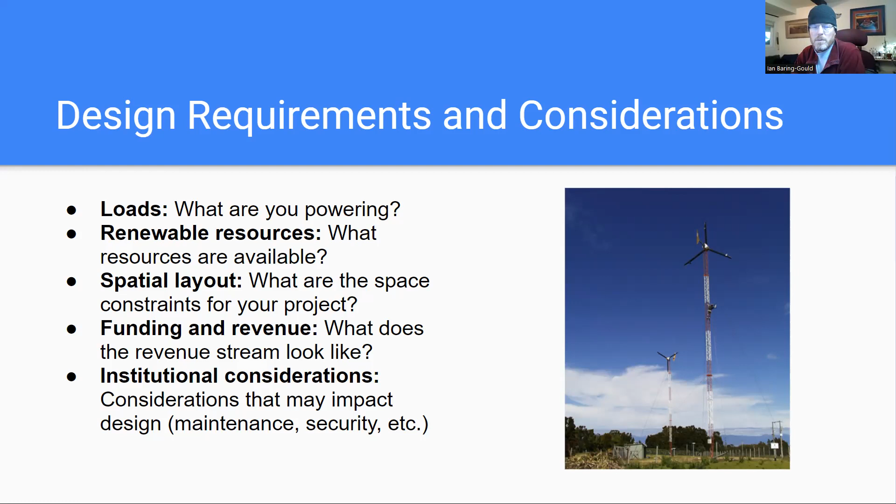So let's go to the next slide, and I'll walk through each one of these at a pretty high level. So looking at the loads, the energy that you're going to use, but building this over the variations that you're going to get from a daily, weekly or seasonal perspective, because all of those will have impacts on your design. A kiosk, as an example, is pretty good for solar, because if it's being used in the middle of the day, you have sun then, but in the middle of the night people are not going to be using it. If you're looking at lighting, on the other hand, the lighting is going to be in the evening. You're not going to need it in the middle of the day. And so understanding that daily variation of when you're going to need to provide that power is important.

From a weekly perspective, do the weekends impact things a lot from a loading perspective? A school, as an example, will have more loads during the school days, and on the weekends the loading will probably be different, with different people using the facility and probably at different times. And then is there seasonal variation? Again, in a school application, in the middle of the summer the loads are probably going to be different than during the school year, and the usage is going to be different.

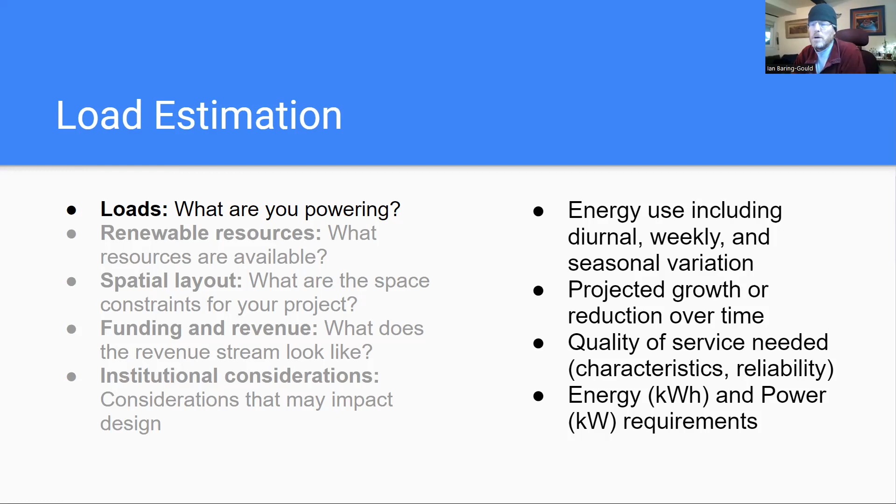All right, next slide. Charles is going to dive into the resources in a lot more detail, how you get those, but at the 60,000 foot level, these questions here are important. So what resources are available, sun, wind, things of that nature? How do they change over time? And how does that change relative to your load? So from a daily, seasonal, and to a degree annual.

Wind and solar is a critical thing around these because in kind of peri-urban environments, buildings get built up and the local wind resource tends to go down. In addition, trees grow. And so in a place where at this year it might not be shaded, in 5 years it might be shaded because the trees are growing in and around the area. So how is your resource availability going to change over time?

And then what are the needs for macro versus micro site assessments? And Charles will be looking primarily at this macro, kind of what is the resource in my area, but for wind specifically, what's around it and how is that going to impact what the local wind resources are.

Okay, spatial layout, the next key thing. And I know I'm going through this quickly because I want to give time for Charles and then some Q&A. So lots of stuff in regards to space. How much space do you have where you are? If you're doing a kiosk, does the solar have to be on top of the kiosk or not? Can you spread the system out so that you can put solar on the ground? So how does the space you're allowed for your design impact the final design? It ends up being really critical, and therefore you need to know where it's going to be to understand how you design your system.

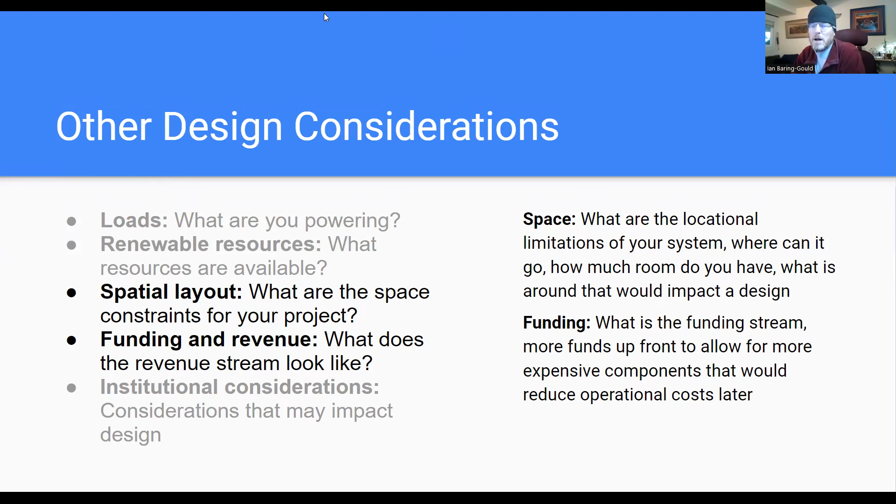This funding thing is also a critical thing because it determines how you build your system. In a lot of the cases, the ones that you're building, no one is collecting money from these things. And so maybe if most of the money is coming from grant funding, you want to over-design the system so that it doesn't have to be maintained very often, and you understand what that maintenance requirement is, because there's not going to be a source of revenue to keep the system operating over time. So how does that funding mechanism impact the design of your power system and the components that you choose to incorporate into it?

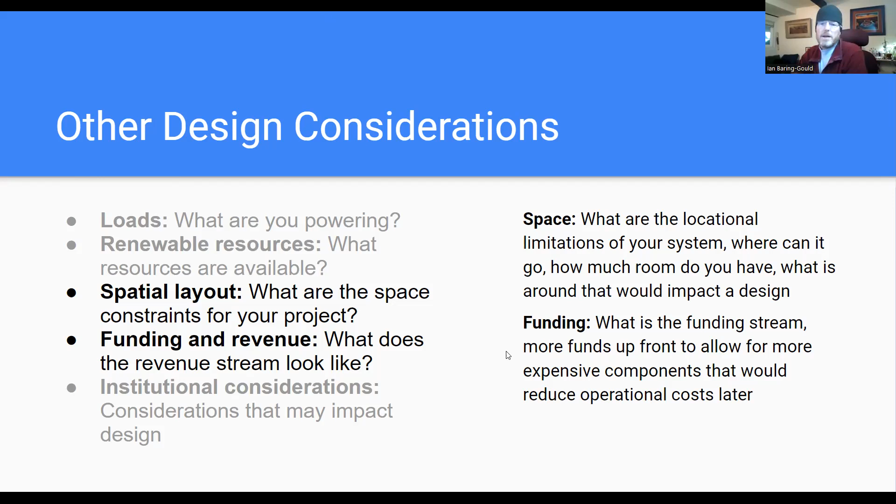All right, institutional considerations is the last one that I identify here. And this really gets into the social dynamics of the systems that you're putting in. A good geeky engineer can design a perfect system that will never work. And so when it never works, it's always the social issues that you run into. And especially in school applications, we've seen this over and over and over again.

So what is the level of maintenance or the skills of people to be able to maintain the systems? And do you want to design the system so that basically anybody can maintain it? And that's stuff like fuses that are easily accessible, or things that are plug and play. So if a component breaks, you can go onto Amazon and buy another one and just stick it in, and you don't need to open a box.

You don't need to do anything to be able to do that maintenance if the skill set of the people who will be doing the maintenance is relatively low. If their skill sets are high, then you can get a little bit more complicated in your design, and it will still work over the long period of time.

Different responsibilities and an understanding of those is critical. Is a teacher going to be the one who maintains this, or is it going to be the facilities guy or gal who is going to be doing it? And is that understood up front so that as things change, you don't lose that maintenance capability?

So teachers change roles quite a lot more frequently than school maintenance staff do. And so are you engaging with the maintenance staff, or are you engaging with the science teacher? Because the science teacher is probably going to be there for a couple of years and then they're going to do something else. Obviously, it depends on the school. And so being able to have that consistency, and when you're designing your power system, you know who is going to be the one who really looks at it over time.

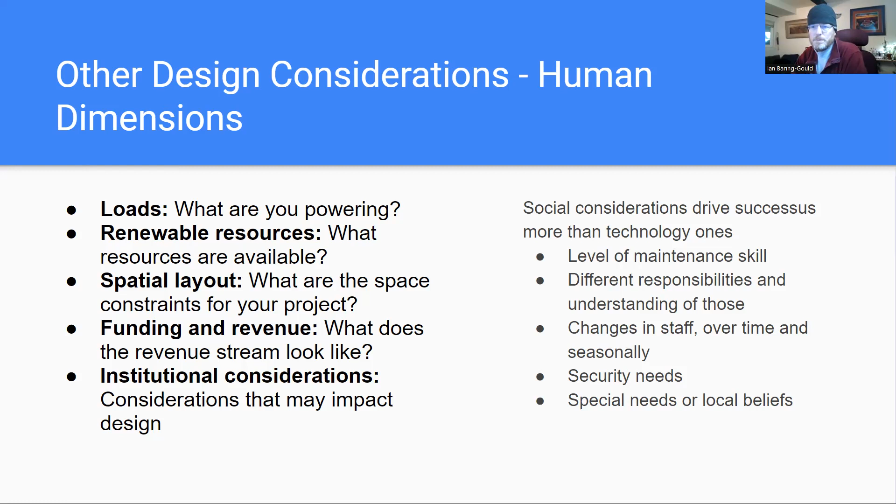Last but not least, once you have done all of that, then you actually get into this question about using analytical tools to design your power system. So all of that stuff that we've talked about, the whole kind of 10 minutes, none of that has actually been about designing your power system, getting the analytical tool to design your power system. All of that is all the pre-stuff that you have to do to be able to do this.

Now there's a bunch of ways to do it, and they can get really complicated or they can be really simple depending on how deep you want to get into it. Certainly, just little spreadsheets are perfectly fine looking at hourly energy balances of wind, solar, storage. You can do that pretty cleanly, and if you have energy storage, then an hourly energy balance is probably fine.

Or you can go off and use these tools that can be pretty cool, but you can spend a lot of time designing these tools or using these tools, figuring out how to use them right. But Homer is a fabulous one. I'm pretty sure they have a student license, but it's only for a shorter period of time. The REopt tool from NREL is another tool that you can use, and they have an online version for that one.

And then we probably won't need them in the projects that you're talking about, but eventually you get into these power flow and dynamic design tools, which if you're designing larger power systems, you're going to want to be able to get into because you're looking at more advanced controls as well as power flow. But at the sizes that everybody has been talking about here, you probably don't need to get into that level of design work.

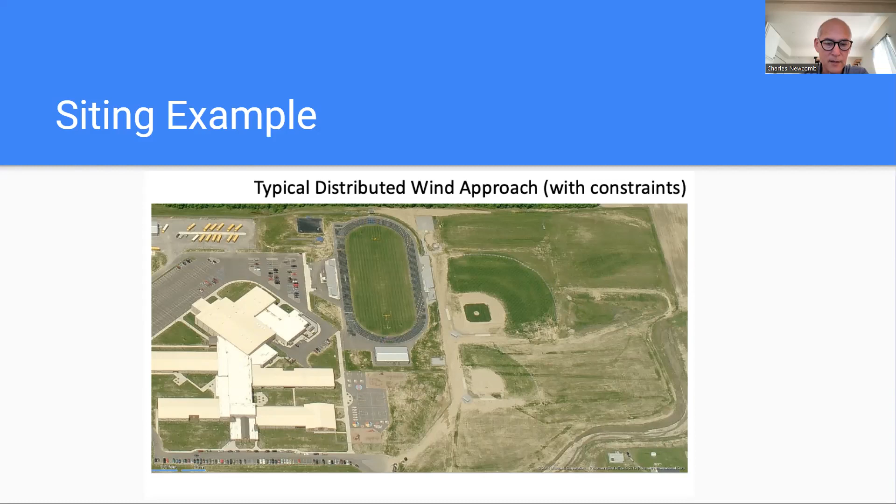The next slide shows you, okay, well, here's the drawing of actually what they have planned as they build out their school. Next slide, Remy. And you can see that the northeast corner is pretty full of fields. They've got a couple baseball fields they're going for, and soccer fields and things on the east side. You're like, okay, well, there's still some room up there on the north end. Let's go to the next slide. The next slide sort of shows you the constraints.

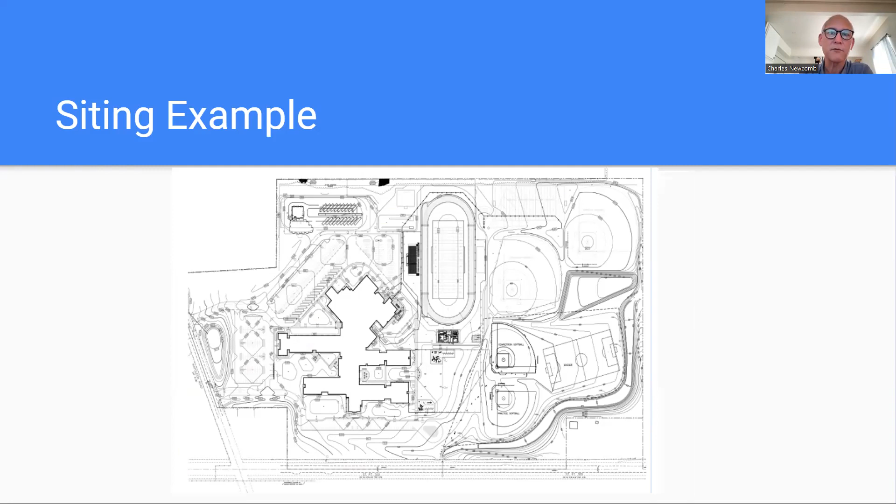And what you'll find here is that Fish and Wildlife in Ohio, because of the Indiana bat issue, was like, you've got to be 200 feet away. Next slide, Remy. You have to be 200 feet away, or 1,000 feet away. So that was the setback. We had these little setbacks from properties. That's the pink, but the blue line is the Fish and Wildlife setback line.

And when you're all done, you're allowed to put a wind turbine deep in the infield, sort of basically where the batter is standing. That's where you can put the turbine. And so when we talk about constraints, that's just something to keep in mind, is that there's always a lot of people who have opinions around where things can and can't go. So that's the end of that siting example.

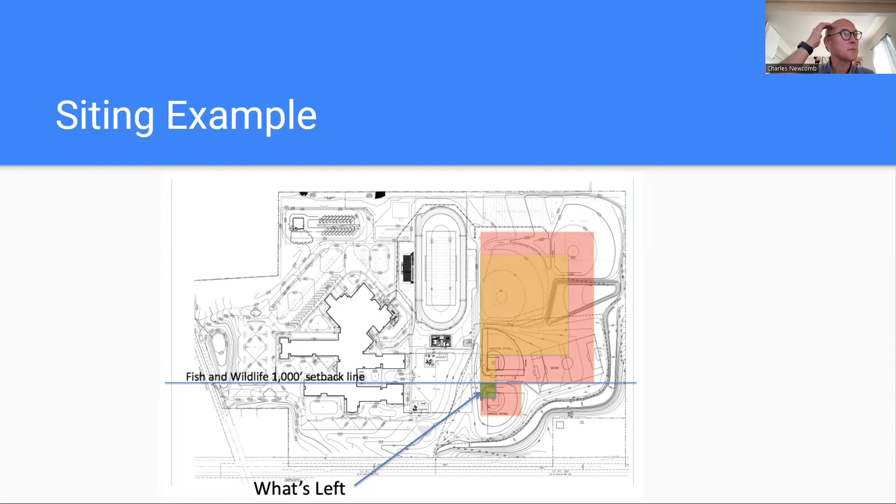Okay, next slide. So we'll jump right into the resource side of things. A little bit about wind maps. Wind maps are kind of a chain of models. There's these global reanalysis models, which are taking data from tens of thousands of points, airplanes, buoys, surface observation stations, boats, you name it, satellites, and they're stitching it all together into a global weather model, which has about a 20 to 30 kilometer resolution. But it's physics consistent, it's accurate, it is simply a physics-based model that joins all the observations.

That's what reanalysis is. And then you take it the next step down, reanalysis forms the boundary condition for the next layer in, which is usually a weather research and forecasting model, which again is another physics consistent model with 60 different knobs on it for evapotranspiration rates, terrain, ground cover, urban settings, all these kinds of things that are going to affect the flow of air across, with the reanalysis forming the boundary condition for that model as it moves through.

And the WRF model, the weather research and forecasting model, goes back and forth. It's usually a 4D VAR. It's looking backwards and forwards in time. It's assimilating data as it comes in from observations, and you end up with these crazy stable models. And then you get down to a couple kilometers. That takes you to 2 to 3 kilometers or so.

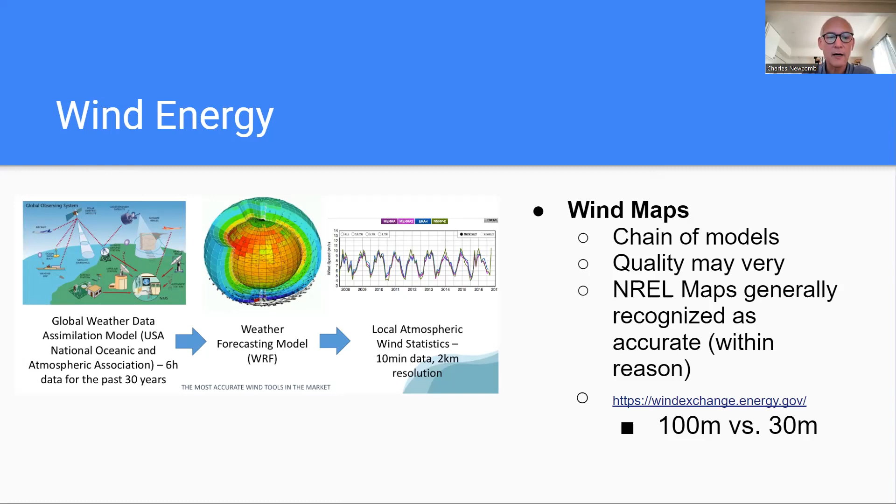Next slide. So the wind maps, where do you get these things?

There's a few commercial systems out there still. Underwriters Laboratory has a nice one, the Wind Navigator, that was UL. NREL has a lot of free maps, and you guys are savvy enough to be able to take these maps and drape them in Google Earth over where you are and kind of get an inexpensive estimate of wind speeds down to about 2 kilometers, something like that, or 10 kilometers, even if they're a 200-meter map, meaning the resolution

in this map on the right and the left, I think, are both down. They both come out of AWS. So the underlying data set was maybe at a couple hundred meters. The map is not infinitely high resolution. So that's why I'm like, you'll get to a couple kilometers, and that's probably good enough for your purposes.

They are free. You're going to be tempted to use the one on the right, the 30-meter map, because what you're thinking is, it's short. It's 100 feet. That gets me closer than 100 meters. 100 meters is pretty tall. And I'm going to say the downside of the 30-meter map, I mean, it's good for screening, but the downside of it is that you may believe it, right?

And you have to be very careful, because these maps are using land use data sets that may be a little out of date, or they don't identify a copse of trees that's less than some acres in size, all these kinds of things. So wind maps are better when you look at them as an advisory tool, as opposed to an actual number. And that's true for even things like Navigator. When you're dialing it in, you're getting a 200-meter number. You still have to take that with a grain of salt.

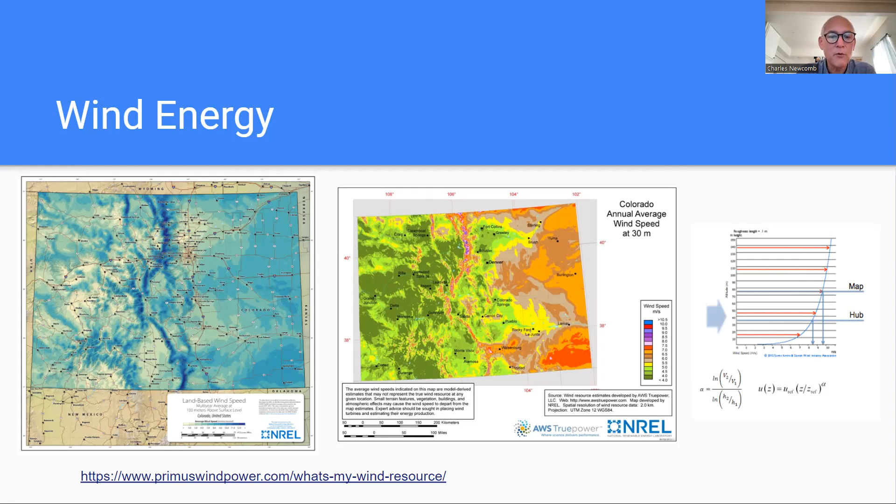So what do you do with the wind speed? Well, you can't just say, oh, it's 7 meters per second. What's the power at 7 meters per second? Multiply that times 8760. You cannot do that. That's not how it works. Despite the fact that's how Ohio did it for years with their incentive program.

And then you say, what's the probability of any wind speed bin happening? And what's the power that I'm going to get out of that bin? And now you have a probability. You say, well, I'm probably going to get 800 hours at 200 watts and 1,000 hours at 300 watts and whatever it is. So that's how this math is done, where you take the wind speed bin, the probability of that wind speed times the power in that wind speed bin, and then sum that up.

So the next one over, real quickly, the power curve. You guys have heard about them, but the test data is really important. Anybody who gives you a power curve, it should be a certified power curve, something that an independent body has verified. And so that's that 61400-12. That's the standard that says this is how you test turbines. It talks about the instrumentation, how long you have to do it, how you divide up your bins, 6.5 to 7 meters per second, and how many minutes you need in each bin, all those sorts of things. So that's very important. Next slide.

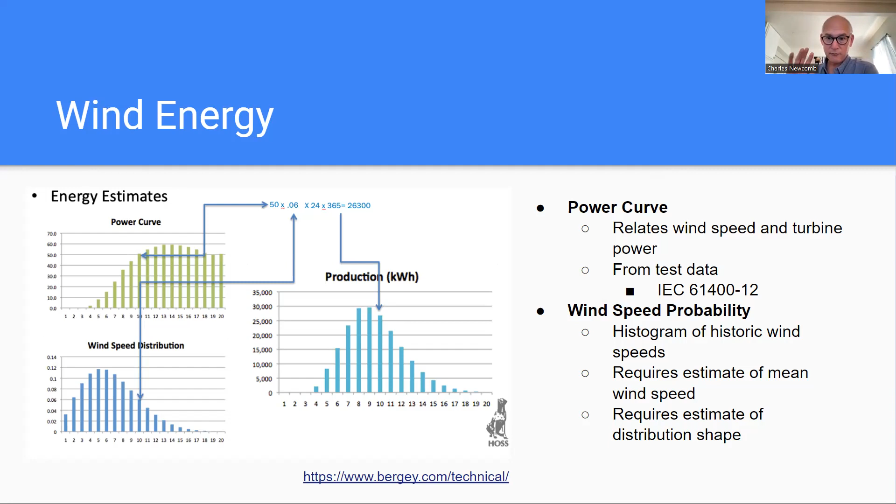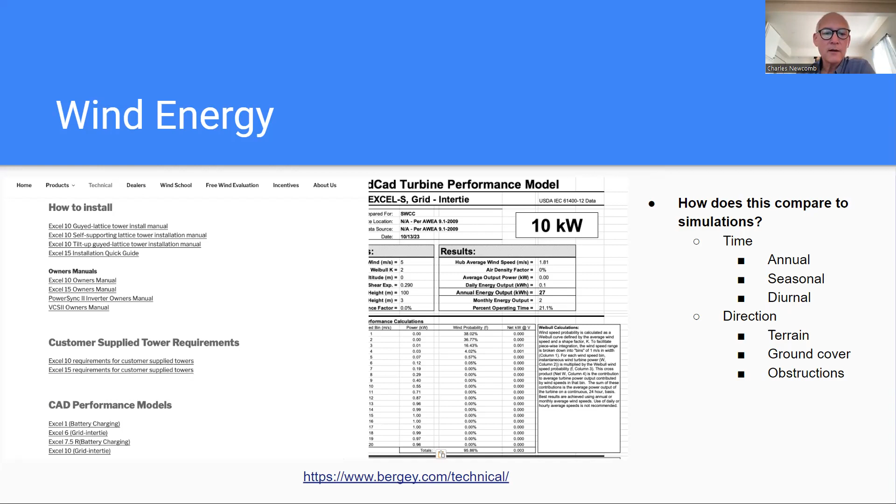So that gives you the gross output, and this tool would do that for you. Just like anything, when you get a gross, you've got to net it down, and there's a few things in your estimate that are important. Number one is, is it going to work all the time? Like every time you put the key in the ignition and turn it, is your car going to start? Small wind turbines, they might start a lot of the time.

They do have faults for sure, but it's usually not the equipment that fails because they're so simple, right? If this turbine doesn't work, it's not going to work tomorrow. There's no reset from the factory that somebody's going to do remotely. It's dead until you fix it, right? So you may as well assume that it's just going to work. Now what's going to net it out?

Well, there's obstructions. The wind speed that you get off of a wind map assumes there's no obstructions or anything else. So here's a wind shade calculator. The best thing about this wind shade calculator, if you go to this link on the bottom, there's a little directory tree on the left. This is the Danish Wind Energy Association, and it has this sort of PhD in a box. You could read this website and you will know everything there is to know about wind. It's insanely good.

This shade calculator tool uses the Perera equation that is referenced in that -12 standard. Perera was an ag engineer in the Netherlands or Denmark, I can't remember, who did a lot of this early research. And this model, ironically, is a simple model with maybe 5 or 6 parameters: the relative height of the hub and the obstruction, what's between the obstruction and the turbine, is it trees, bushes, cars, whatever, and then how porous the obstruction is, all these kinds of things.

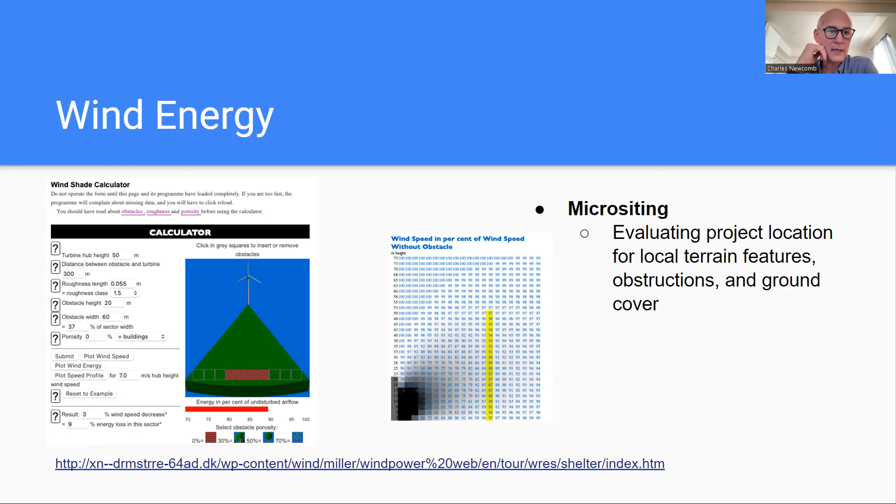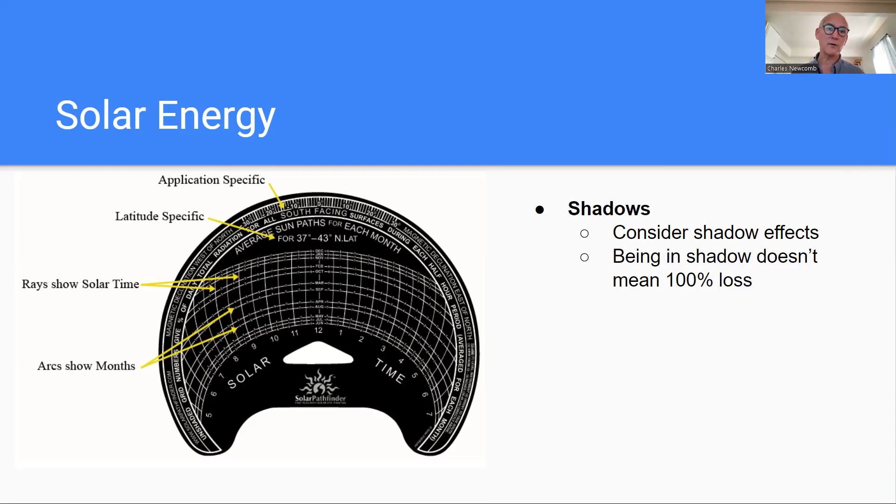So just know that it's hard to turn off a solar panel. You actually have to cover it with a tarp or cardboard on top of the panel to get it to go dead on you. So do keep in mind that you're going to need that. Okay, next one. And I think that's actually it. So there's your solar and wind resource in a bottle in like 2 minutes.